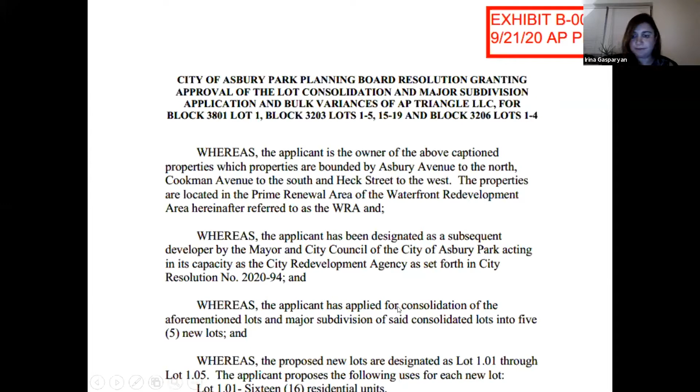Resolution memorialized. Great, thank you. Okay, we have an application for 503 8th Avenue LLC. They have requested to adjourn to the next meeting on November 2nd, 2020.

Can I get a motion to— If I may, sorry for the interruption. Madam Chairwoman, I've reviewed the notices with Irina in great detail today. They were in proper form, so the board does have jurisdiction to hear this matter. Is this the one for 8th Avenue, Jack? Yes. Okay, so then can I get a motion for it to move to the next meeting without notice?

Jim Henry, so moved. Motion. Thank you, I have a motion by Jim Henry, seconded by Alexis Taylor. All in favor, say aye. Aye. Any opposed? Thank you. Application carried to November 2nd, 2020 without further notice.

We have, if I may, Irina, I think I saw an email from Kevin that in addition to the request, he said that he would extend any time necessary. Is that correct? Yes, sir. Okay, thank you, thank you.

Okay, so the application that we have before us today is for 202 to 204 7th Avenue, block 4201, lot 3 and 4. All right, let's get started.

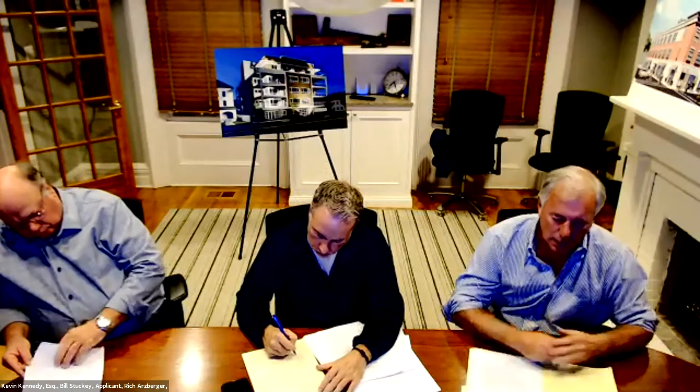In that 45-day period, Rich and I met immediately—he's great at sketching things out. We put the lobby off of 7th Avenue with a vestibule, and it's going to be a beautiful lobby. We created the bike or storage room and rearranged our parking. I think we lost a couple of parking spaces, but it doesn't really affect the marketability of the building. Then I went down to Trenton and met with Michael Sullivan and went through the changes we had made. Michael and I talked for a couple of hours, and we made some changes to the exterior finishes of the building.

In November of 2019, we went back to the TRC. Before I talk about that meeting, I want to say, out of this first TRC meeting, the building became better based on those comments, which I don't think a lot of developers necessarily say, but it was a good thing.

So I came back with Kevin and Rich. I think we were there for 10 or 15 minutes, and everyone liked the changes, made the building better, and I think everyone was in agreement this was ready to go to the planning board. So that's about all I have to say.

I've reviewed the comment letters from Insight and Clarke Caton Hintz and talked to my professionals. There's a lot of minutia that we may have to go into tonight, which is okay, and Rich and Walt are ready to do that. But I think the question ultimately that I'd like you all to consider is, is this a good looking building? And do you think it belongs in the WRA? I know the TRC felt that way. Pat and I feel that way, as does Sonnenfeld and Trocchia. So without further ado, Rich is going to go through his presentation.

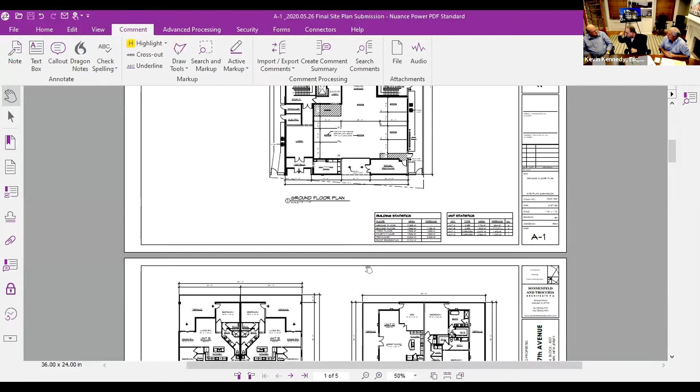Irina, can we get the rendering up, please? You want the rendering up first? Please, please. Sure. Okay, everyone see that? Yes, thank you. All right, and that's been marked into exhibit as Exhibit A2.

So Rich, why don't you describe what the board members and public are looking at? I'll wait for it to generate. Okay, what you're currently looking at is a color rendering of the proposed building, this is the view from the street. As you can see, the building is a 5-story, 14-unit multifamily building which has a roof deck at the uppermost level, as well as a parking garage at grade, which provides 23 parking spaces within the building.

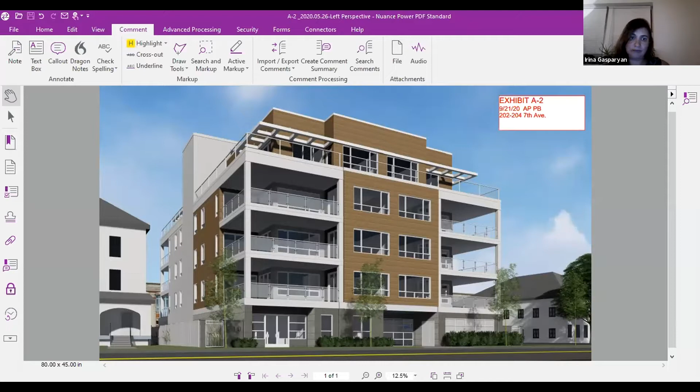Rich, do you want me to bring up the plans? Yes, the sheet A1 to start with. Okay, and these plans have been marked into exhibit as Exhibit A1, dated 2/27/20.

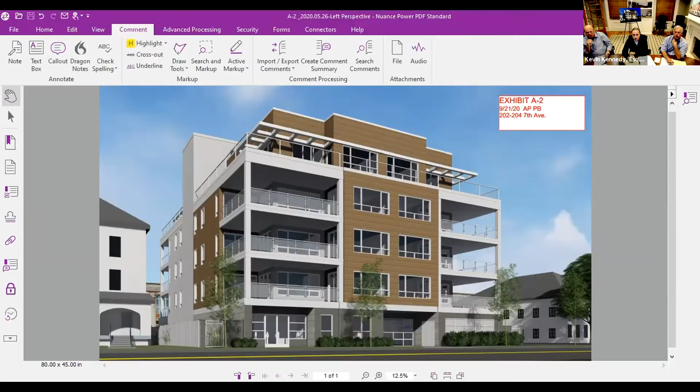Okay, exhibit A1. What you're looking at is the ground floor plan for the building, basically the parking garage level. In the lower left-hand corner is the main entry lobby, which provides access to the elevator lobby and stairs. Behind the stairs is a bike storage room, accessed solely from the exterior.

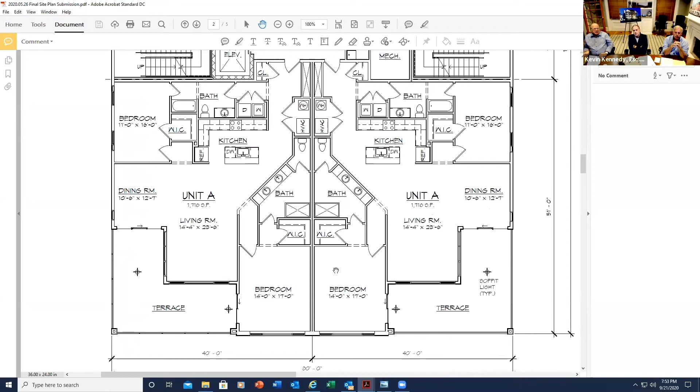The top floor, which we label the penthouse floor, is next to that. In this case, what we were proposing to do is provide larger luxury units, true penthouse type units, in which the living area is larger than the units below, basically creating a premium unit.

In addition to the 2 bedrooms and 2 baths, there's a half bath as well as a den and a very large great room area for living and an expanded island kitchen area. The terrace wraps around each of these units. This is the front unit, basically half the building. On the other side of the corridor is the rear unit, which is slightly smaller than the front, but has many of the same components as the front unit.

That has a double master suite, half bath, as well as the enlarged living area and kitchen, and a very large den. So these are premium luxury units which are located on the top floor of the building.

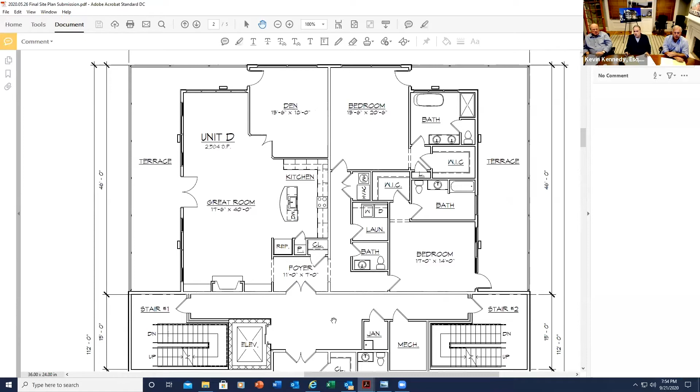As I said, that stair and elevator goes up. Both stairs and elevator go all the way up to the roof, which you'll see on the next sheet.

Now this is, what sheet number is this? This is what, A4? Yeah, sheet A3 of the submission.

As you can see, the stairwell and elevator go up to provide access to the rooftop deck. The usable deck area is primarily to the front side of those two elements. Between the two elements, we've located a kitchenette to provide service to the upper level rooftop recreation area, which provides for passive entertainment. We've also provided a grill and so on.

You'll also notice there are a number of HVAC units, which are condensing units, located in an enclosure to the front adjacent to the stairs. We also have some additional condensing units located on the rooftop to the back. The roof area is basically just primarily for those two mechanical equipment areas, with no access for resident uses provided—it's mainly for maintenance purposes. As you can see, there's a door that goes from that kitchenette area to provide rooftop access.

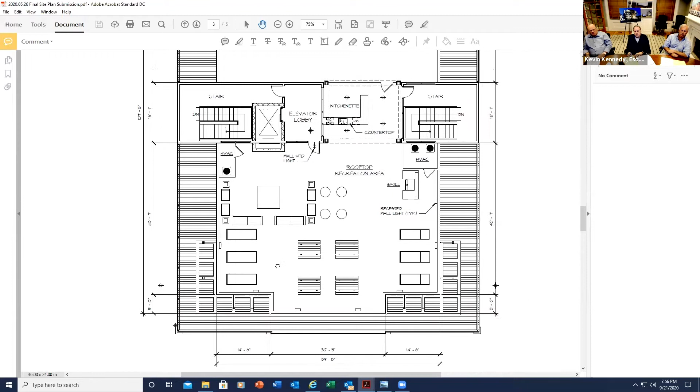And that's basically the way the building lays out in terms of plan. Next, I'll go over the elevations.

Next sheet. Next sheet is sheet A4 in our submission.

And the top elevation illustrates the front elevation of the building, which is what you would see from the street. As you can see, the building height is proposed to be 60 feet.

The primary material used throughout the building for cladding is fiber cement board product—various types, textures, and colors, but the entire facade treatment is done in fiber cement cladding, and that's described in detail on the elevation. You'll notice that at grade level, the access to the garage is by way of an aluminum and glass garage door.

I'll address that specifically in the comments for the Clarke Caton Hintz memo. Likewise, the guardrails for the individual decks are composed of glass and metal. I'll also go into some detail on that.

The windows are a combination of fixed and casement windows. There's also some windows located in the refuse area, as well as the parking garage and entry vestibule, to give more interest at the street level.

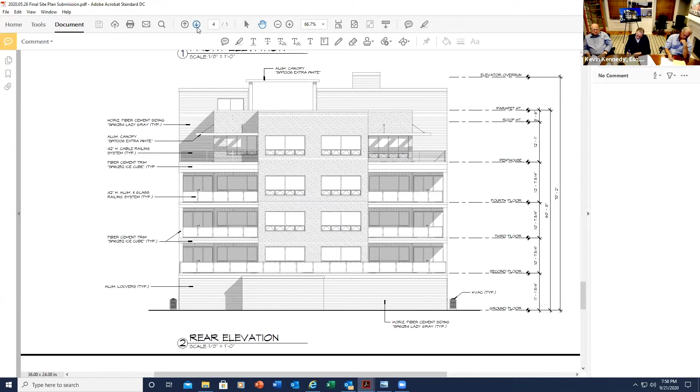And I think as far as the architectural drawings, that completes our submission as far as the architectural drawings go.

The next thing I'd like to address would be the comments from the planner's letter, Clarke Caton Hintz letter, dated September 14th. In that letter, specific testimony was requested with respect to waivers that we will be seeking for the application. I'm going to go through a number of the waivers required in terms of architectural waivers. I think Mr. Stocky plans on testifying to a few of the more owner-oriented elements, but I'll go through the architectural ones.

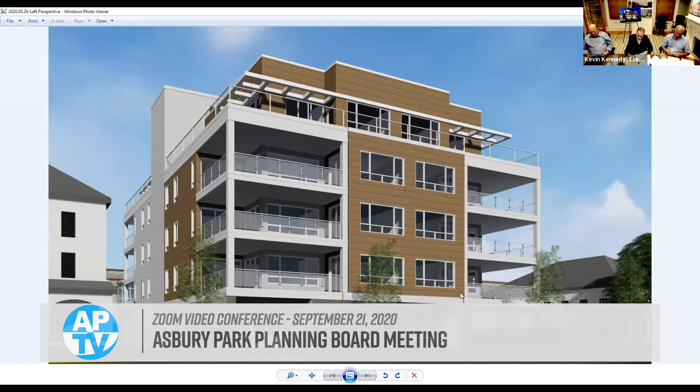Item number 5 deals with the masonry or metal parapets required under the guidelines, which call for a 42-inch railing height proportioned by a separation of grill and handrail or some other such method. What we're proposing instead is a glass guardrail, as illustrated - a safety glass guardrail held in place by metal posts and rail. The idea was to provide maximum transparency so nothing obstructs the view to the exterior, either from the outdoor terrace or from the interior of the units, particularly the primary living area. We believe this is still in keeping with the overall design theme of the building, and we're therefore seeking a waiver from the requirement.

Item number 6: windowsills shall be provided and lintels may be shown, but the windowsill should slightly overlap the width of the window opening without projecting more than 2 inches. The building's window design does not provide windowsills. In this case, we're looking for a clean look without windowsills - as you can see, there is no extension along the bottom part of the window. It's more in keeping with the contemporary expression we're seeking here, so we're seeking a waiver from the specific requirement of providing a windowsill.

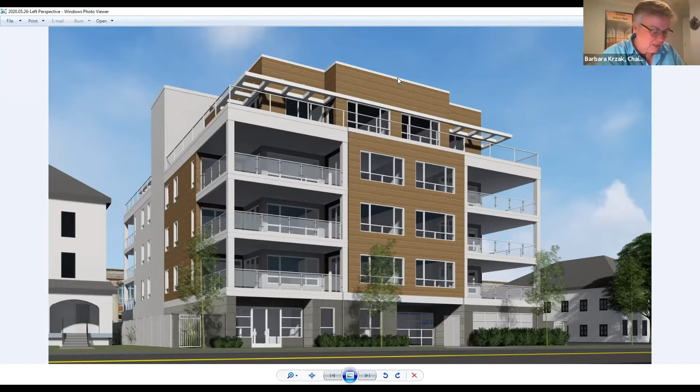I'm sorry Mike, just one second, I just want a clarification. Is someone going to be speaking about the lighting, the lighting plan, and the lighting fixtures? I guess that's what, yeah, Rich. Yes, I'm addressing that. Okay, so then your testimony isn't finished because we haven't gone over the lighting plans or the fixtures you've provided us, right?

To the best of my knowledge, both the revised lighting plans, as well as the fixture cuts, were provided to the board as part of the submission. That's correct, but are you going to be reviewing them with us? Yes, we absolutely will. Okay, so someone will be doing that. Yes, we'll continue, do you want us to do that now?

Do you want to finish with the questions? We'll have Rich testify as to that. Okay, if someone else is going to do it, I just want to make sure. No, we have.

It'll be Rich. Okay, go ahead, Mike. I'm sorry, no problem, I'll stop the questioning on the lighting there then.

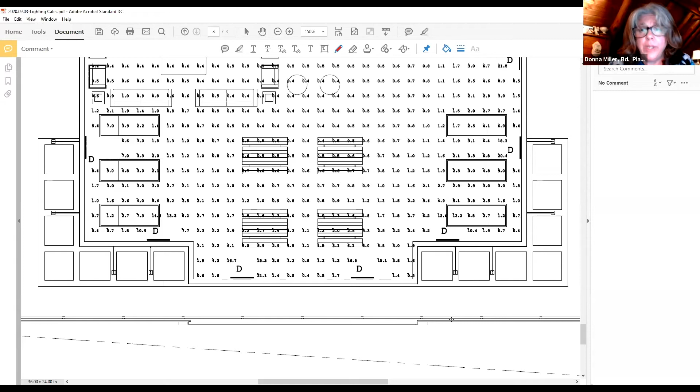Can I just interrupt? I'm sorry, Mike, it's Donna. So are we going to get copies of this revised lighting plan to look at? Because I don't have them. There were some in our packet dated September 3rd.

When we received the comment letter from Insight, which had issues needing further clarification with respect to the lighting and foot candles, I called the architect and said here's the comment letter, revise them. They were sent to Irina, I believe, and Donna, I don't believe they've been sent to you yet, or Irina could address that. Even if you got them the day after we sent them in, you wouldn't have had time to analyze them. So with respect to the new plans Rich was talking about, we would suggest that during compliance, you and Insight have final say over whether we're complying or addressing the issues the board has.

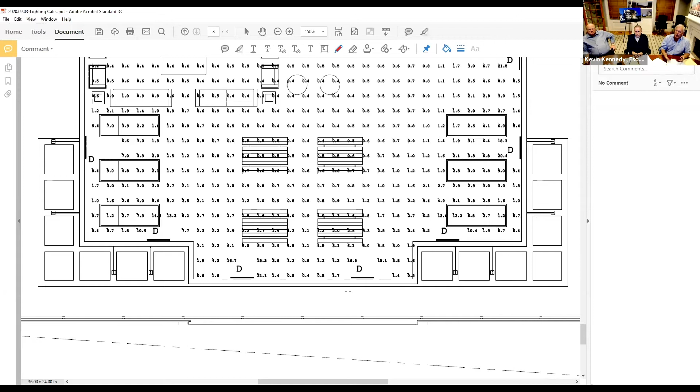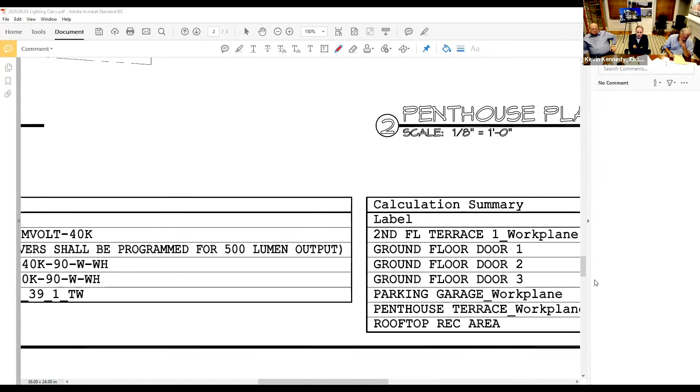Well, I think the board would rather decide whether it complies and not leave it to either Jason or... the board should have a presentation to us about the lighting plan. I'm guessing the date on that was 9/3/20, that's the plan we're talking about? Yes. Okay, so we have that, I have a whole lot of pictures of fixtures that were also included in our package. I would prefer not to have it left to our engineers or planners, the board needs to witness this. Madam Chair, that's an excellent thought, and we will address that after we're finished with the questions. We'll have Rich testify to that.

Does anybody else on the board have any other questions? I had one more question, sorry.

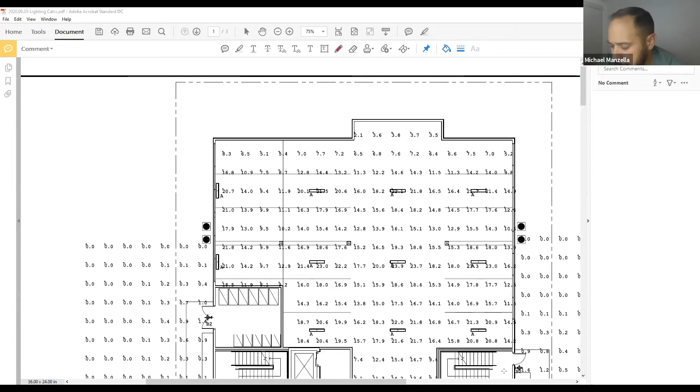So when it comes to item 6, you were talking about windowsills. And I agree that with this modern design, windowsills are probably not necessary. However, my only question is, the 6 larger windows that make up the bulk of the front facade, it seems like some kind of treatment is needed there, other than just a flush window right against the siding. I don't know if those are operable or not, specifically.

The windows you see, why don't we go to the elevations? You can see it a little easier there. Okay, let's go to the front elevation. The window units, which I assume are standard window units, come with a brick mold around the perimeter. So you see a little wider outline around the windows, and on a drawing like this they'll be more noticeable, and they're not flush. They do have some relief to them.

The windows themselves, for example if you look at the windows in the center of the building, you'll see there are 3 windows above 4 windows. Where you see a little triangular dashed line, that indicates those windows are casement windows. So the 2 end windows are casements, all the other windows without that designation are fixed. Between the 2 casement windows you have a large picture window, and below it individual fixed units as well. The windows come from the manufacturer as mulled units, so all 7 of those individual units are combined into one at the job site.

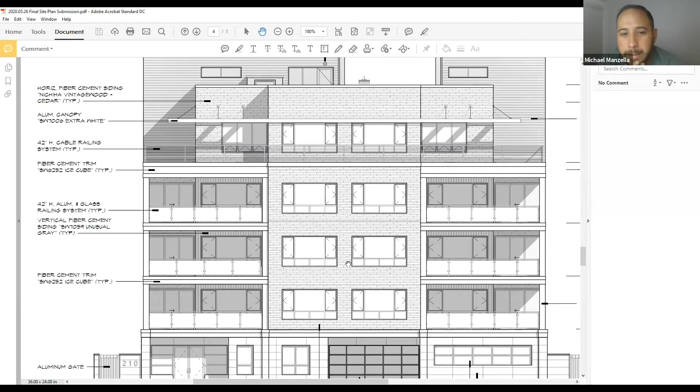Great, that clarified it. So the brick molding you were speaking of, that's not flush with the facade, it has some depth to it? That's correct. Okay, then that answers my question and comment. Thanks.

All right, on one, can you go back to what you just mentioned? Out of those 7 pieces to that window, how many of those are open? 2 of the 7, as I said, the 2 vertically oriented ones with the dashed lines. Those are casement windows. Where they come to a point on the outside, that's the hinge side, and where it widens out, that's the side which opens.

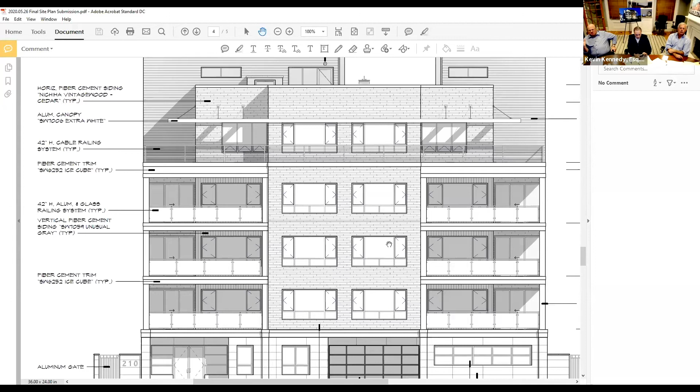You follow? Yes, yes. Jim Henry, I've got a couple more questions about those windows. You answered one of them. On the windows on the north facade of the building, the 2 casements are the only ones that open. How about on the patios? It looks like there's 2 other windows on the patio that open, but how about the others on the east and west side? Are they fixed?

Okay, you're talking about the side elevations. So once again, this is the side elevation, you'll see that once again. No, I'm talking about the north elevation. The north elevation, that's the front elevation. Front, okay.

Okay, the front elevation - immediately to the right of the windows I was discussing, there's a triple window with 2 casements and a picture window in the middle. The 2 casements on either side of the picture window are operable. To the right of that is a sliding glass door with an operable center panel.

You indicated that you have no sills, but that the windows are not flush. What is the setback from the front facade? Probably 1 inch and a fraction.

The wall construction for the upper levels is wood frame, with the fiber cement system we're proposing there's a rain screen of approximately 1/2 inch, which provides area for surface drainage behind the cladding and for the tracks for installation of the fiber cement panels. The panels themselves vary from 3/8 to 1/2 inch in thickness. The window flanges are installed on the structural sheathing, so basically you have 1/2 inch airspace plus at most 1/2 inch of cladding material.

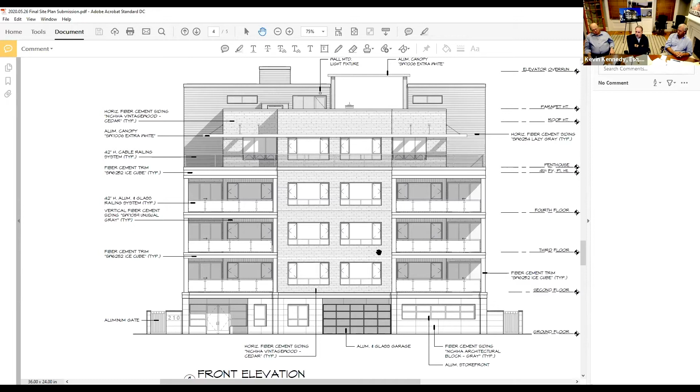How difficult would it be to put in sills on all these windows? Can we come back to that question in a little bit? Sure, when we take a break we'll talk about that and come back to you, sir, if that's okay with the chair. Anybody else have any other window questions? Let me just do my window question and then we can move on to the others.

When we're talking about the rear elevation in the center, are any of those windows fixed? Yeah, once again the top picture windows are fixed, but the awning windows are not fixed - they operate with a hinge on the top and open on the bottom. Okay, are there any other fixed windows that we should know about, instead of me asking if it is or isn't?

If you look at the 4th floor on that same elevation, under the trellis canopy there are fixed windows above awning windows. As you go down the building, likewise you have fixed windows on top with awnings below on either side, and sliders at the extreme corners on either side.

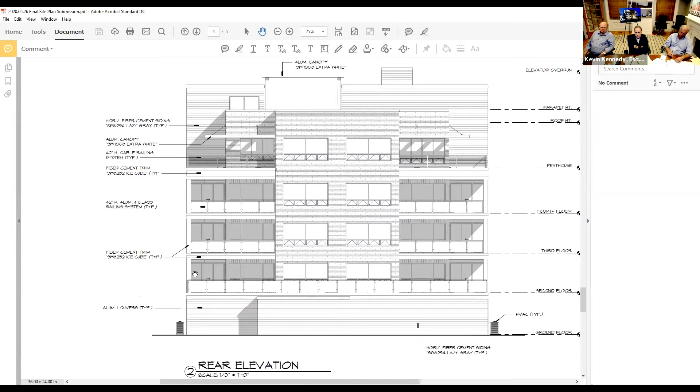On the side elevations, you'll see that triangular indication is a casement window, so those are operable. However, the windows below and to the side are fixed. Likewise, the narrow sliver windows at the very end are both fixed. You have a similar configuration as the other case, with fixed above and awnings below at the terrace location, as well as sliders. In the penthouse, the end units have casements over awnings, and in the middle you have fixed over fixed.

In each space it was our goal to provide adequate ventilation, so there are operable windows in every room within each of the units. But we wanted more light in addition, so we provided additional fixed glass as well.

Okay, thank you. Does anybody else have any other questions they would like to ask that are not window related? I have a window related question. Sorry, go ahead. This is Donna Miller.

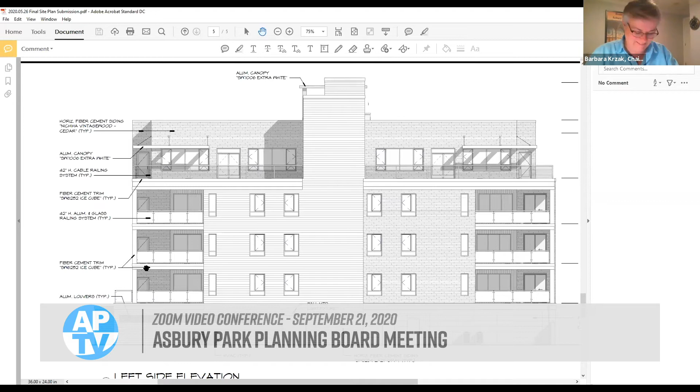So you're saying those are sliders adjacent to the triples on the balcony? Yes, sliders on the side. There's access to that terrace in 2 locations. So why don't we go to the floor plan? I'll explain it easier on the floor plan.

Now if you take a look at the floor plan, let's look at that front A unit. You see there's a bedroom in the front of the building. There's a 2-panel sliding glass door that provides direct access from that master bedroom suite to the terrace. There's also a triple sliding door which provides access from the dining area to that terrace. That's what you see on those elevations. So in that particular unit, there are 2 accesses from inside the unit to the terrace, one from the dining room, one from the bedroom. Okay, just for everyone's information.

And the balance of the windows would then be some combination of fixed, casement and awnings, which I described from the elevations. So just for Jack and Mr. Kennedy, that will be an additional design exception to permit the sliders. That's also a design criteria. Thank you.

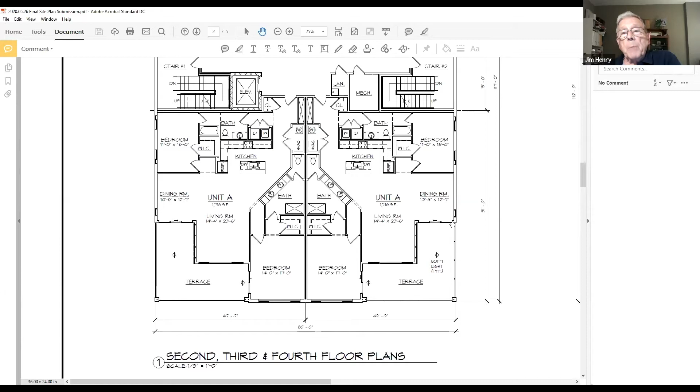That's going to be a mighty small door for a pretty big terrace. I mean, it's a standard. All we're doing is proposing a standard triple slider. I'm not sure about the clear opening when open, but the nominal dimension is about 9 feet with nominal 3-foot panels. In an open position it's probably slightly less than 36 inches, I'd estimate around 32. Okay, thank you.

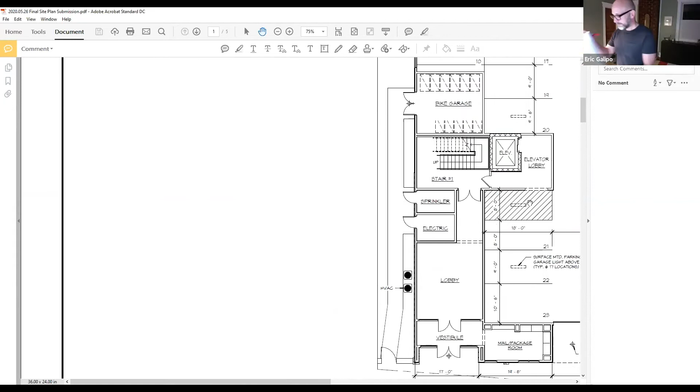I think Yvonne had a question. On page number 8, under section 4.0, the wheel stops in the garage. I understand you said you didn't think it was necessary because residents would know to stop, but wouldn't it be just a matter of safety to put in wheel stops in the garage?

Well, the only thing they would hit would be the wall, so there's no utilities, there's nothing there. Councilwoman, we can definitely agree with that, you wouldn't want their cars hitting the wall. Except the tandem spaces could not have wheel stops, obviously, otherwise you wouldn't be able to use them - tandem spaces are approved. Yes, I'm just talking about between the wall and the first car coming into that space. Wouldn't it just be a matter of safety to do that? We can do that, yes. All right, absolutely, good idea. Thank you.

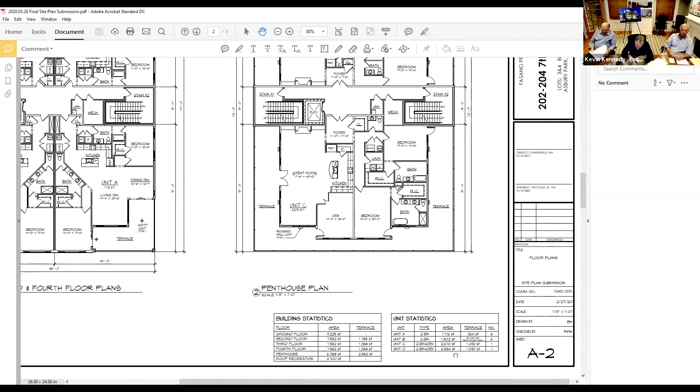Now, can you avail me of your average unit size for A and B? It's about, let's just call it 1,600 square feet. As I mentioned in my opening—read it off the plan. Read it off the plan. Okay.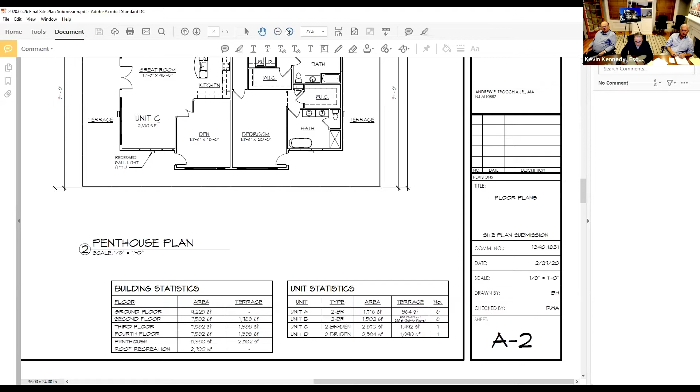Let's start with unit A, we're proposing 1,716 square feet. For unit B, we're proposing 1,502 square feet. For unit C, we're proposing 2,610 square feet. And for unit D, we're proposing 2,504 square feet.

Right, now when we add in the terrace for unit A, it's about 2,000 square feet of lot coverage, right? Right, it's a little bit more than that, it's closer to 2,100. And it's similar for unit B.

Now, the terrace size of unit C is almost as big as the entire enclosed area of unit A. Am I reading that right? You're saying it's nearly, I'll round up to 1,500 square feet of terrace in unit C? In unit C. Oh yeah, those are the penthouse units. Right, but it has a 1,500 square foot terrace. Yes.

Okay, now this may seem a little strange, but I'd like to ask about your front setbacks. Could you tell me how far you sit back from the front property line? Our engineer would probably be better able to address that, if you wouldn't mind waiting, if that's okay, sir?

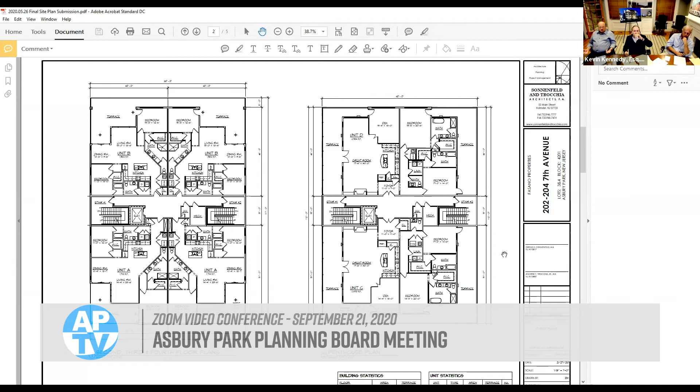And in the consideration of the general mass of your building, how can you speak to how you considered adjacent buildings or the larger context within the immediate area of your site in arriving at your overall massing and design?

Yeah, I think what we started out with, as I said, was driven primarily by the parking. The building width is actually narrower than what the regulation requires, I believe it's a 5 yard or 5 foot setback, whereas we're providing 10 feet on each side.

The rear setback had been a little bit larger, but during the meeting with TRC, we added some depth to provide a 5 foot extension for turnaround on the drive aisle of the parking area. So the building became narrower when we relocated the entrance to the building at grade level from the front. The size and shape of the building have evolved during this process.

And Madam Chair, Bill Stocky has some comments to add. Eric, immediately to the right of this building is a vacant lot, and the rear of the building faces, I believe, the motel site, most of which is a parking lot. To the left of the building, on the corner of Kingsley and 7th Avenue, is I believe a 3-story apartment building. Looks like a house, but it has apartments in it. So on 2 sides of us, we pretty much had vacant lots.

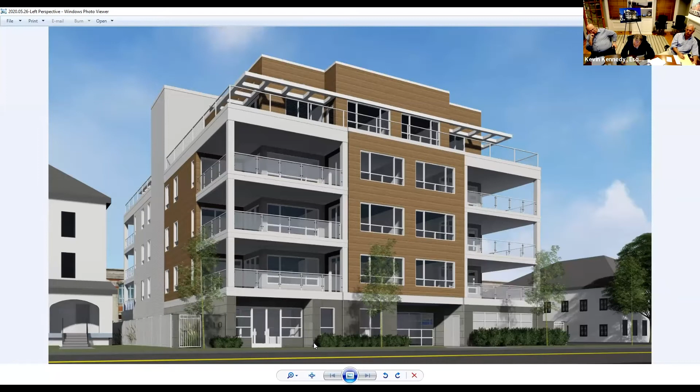Does anybody else on the planning board have any other questions? Yeah, I do, if I may quickly. On the typical units on the second, third, and fourth floor, what is the depth of the balcony from the front of the building to the glass at the rear of the balcony? You can look at A2 drawing 1. Yeah, so just for clarity on your drawing 1, what is the distance from the front of the balcony there, to the note at the other side, the shorter dimension, correct?

He's got his scale out, give us 2 seconds. Are these, is this a full size set? Are these meant to be printed on 11 by 17, or? No, that's not the scale. Okay, about 9.5 feet. To answer your question, depth of the terrace at that point. Correct, 9.5 feet. 9.5 feet. Thank you.

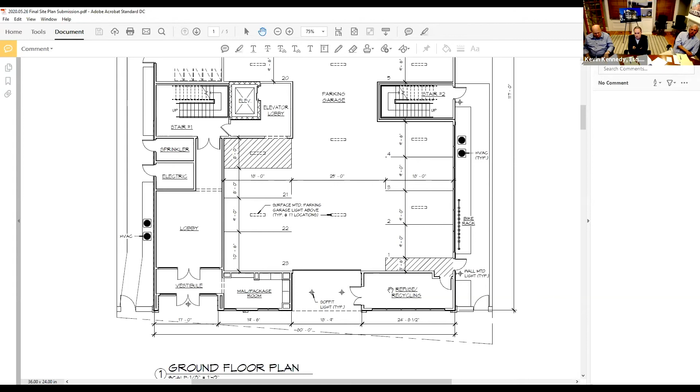Okay, thank you. All right, so the engineer will provide what the on-street striping looks like today and what we're going to have going forward for on-street.

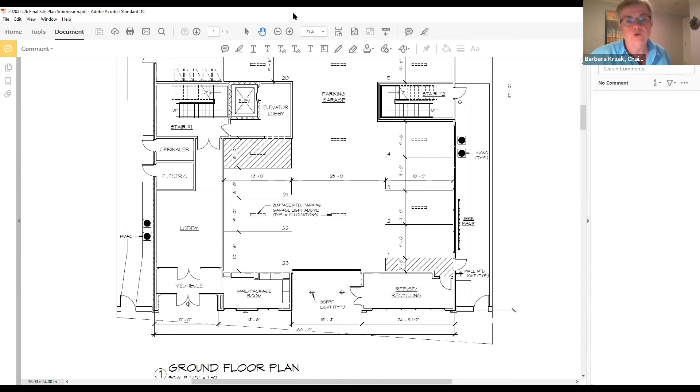There's another thing I'd like to find out, if somebody else is going to speak about it, about the HVAC. Is the HVAC on the east and west side of the building? Are you the one to speak to about that, or do we go to the engineer? Because I know you mentioned it. Yeah, I think that will be our architect. Let me just pull it up here.

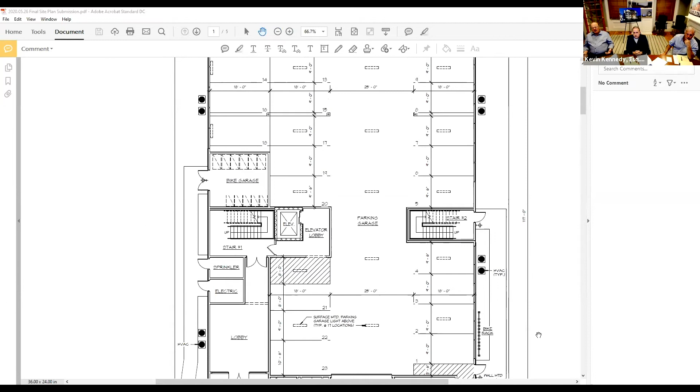Each unit has its own independent HVAC system. As I testified before, a number of those, basically residential condensing units, would be located on the roof. What you see there is a typical fixture cut of what we would expect to use, pretty much like what you'd expect for a small single family house, so each unit would have its own unit like this.

The units located at the lowest levels, we wanted to avoid a long run to the condensing units from the units themselves, so we've located 8 of those, the 8 lowest units in the building, to be at grade in the side yards. You actually have 4 on each side. Those would be screened from view from the street by the wing walls that extend out from the corners of the building, and also screened from the neighboring properties by the proposed fences along the property.

The noise from that would be about what you would expect for, as I said, a single family house's condensing unit.

Right, but at this point, this kind of equipment shall be permitted in rear yards only, not side yards. So that's why I was wondering why we would put it on the side yard if they're permitted only on rear yards.

Once again, because of the length of run it would take to get from the front units to the rear of the building, we located the 2 that are in the front for each side in the side yards. If you pan up, you'll see in the rear they're located off the side as well for the 2 rear units. No, I understand what it says, but I just don't understand why it's not on the roof like the rest.

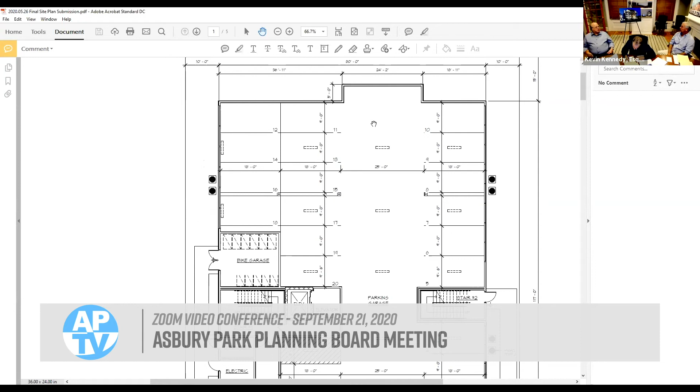Because we were trying to avoid a long run from the lower level up to the rooftop, to avoid any issues with respect to the length of those lines. At grade, you're 5 stories below where the topmost units are located, and the desire on the part of the developer was to avoid issues associated with locating them so remotely, and the extent of the line required to connect the air handling unit within the unit to the condensing unit that serves it.

It's really a practical consideration. My concern is whatever is going to be in that open lot to the right could be under someone's window when that lot gets built upon. So that's why we always said to put them in the back.

Keep in mind our setback from our wall line where those are located on each side is about 10 feet, and we're proposing a 6-foot fence. It's very similar to what you'd expect to see, or be aware of, in a single family lot.

Does anybody else on the planning board have any questions? Do our professionals have any questions? I just want to take a poll from the planning board members if they would like a 5-minute break, or we plow on. I would like a break, said Jim Henry. Okay, let's go with a 5-minute break.

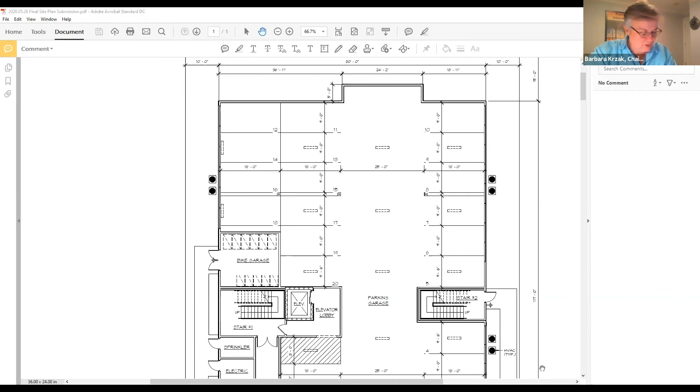I just have a quick question about whether the room is strictly internal mechanicals, or will that also be meters? The electric room would serve electric panels. The electric meters would go outside on the wall, outside the electric room, on the side wall next to it, adjacent to the electric room. The panels would be inside.

Okay, and then what about natural gas metering? Do you have any idea where they're going to be banked on the building? The gas meters will also be located on the sidewalls. On just one side or both sides, do we know? We'll let the engineer address that, because that's dependent on where the gas line is coming from.

I know on the rendering, on one of the elevations, there's an image of the address number. Is that the extent of the signage for the building? Is that the only sign? Yes, it will comply with the redevelopment regulations. Well, there really aren't any signs, that's why I'm asking. Just the street number, not a building name. No building name.

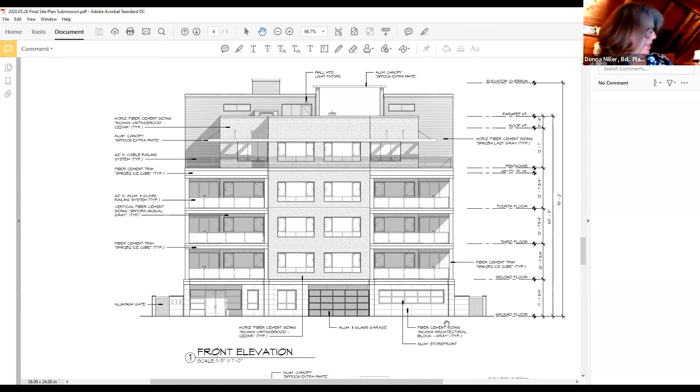I think that is it for now. Quick follow-up: I'm assuming that refuse room will be climate controlled, whatever it takes? Yes, it'll be mechanically ventilated. To the roof? I would assume to a sidewall, but we'll decide that when we work on our construction documentation. Likewise, the parking garage—you'll have to tell the board what you're doing with that issue, because coming out of a sidewall could affect your neighbors.

The board's going to have to make a decision whether they want it to come through a sidewall or through the roof. Can't go through the roof, so you might have to go an alternate route. The board is going to be the one to determine which way - it'll either go out a sidewall to the side yard, or out a sidewall adjacent to the garage door. It will not go to the roof.

The board's got a decision to make on that issue. Does anybody else have any questions, the board or professionals? For the engineer? I don't have questions, but I do have some thoughts.

Would you like to voice your thoughts before we go to the public? Yes. There were a number of points made that there are going to be amendments submitted - rear elevations, more clarification on side elevations, some other items. I think before we excuse the witness, the board should go over what the board wants to see, so we give them a detailed list of what we're looking for next time, so there's no guesswork.

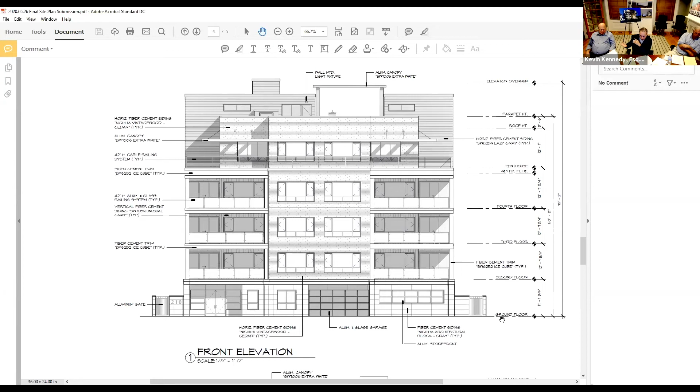I would appreciate that, thank you. Okay, you can go to the public. And Madam Chair, if I may, I think we are going to have the architect testify about the lighting fixtures and describe that. I can do that after, or before we open to the public, whatever you prefer. Well, if you do it now, then we'd have to go back to the planning board members and the professionals.

Do you think we should mention the items we're interested in before we go to the public? Yeah, and I also think from a procedural perspective, if there's additional direct testimony from the engineer or the architect, you should get it now so that you're not going to get public questions. Once the architect speaks about the lighting, he's going to be subject to cross-examination by the public, and the most efficient way is to have it all done at one time.

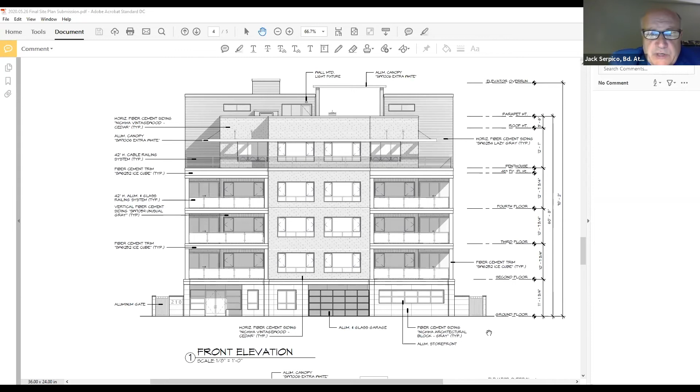So we should do the lighting now? Yep. But you should also give him the list when he's concluded of what you're expecting to see in the future, at another meeting for consideration. Okay, all right, so let's talk lighting.

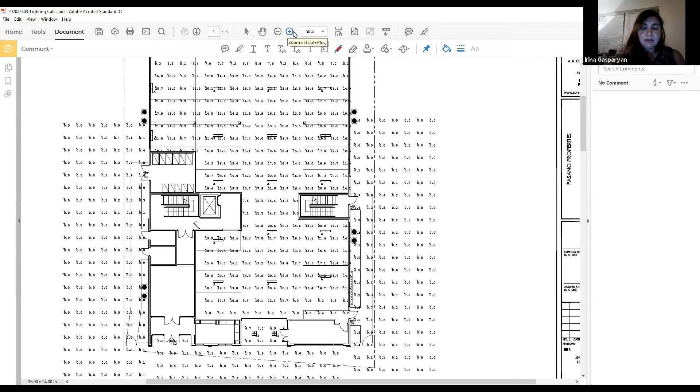Thank you, Rich. There were a number of questions brought up about the revised lighting plans and the lighting fixtures, what they're going to look like. Can you bring them up on the board and describe them so the board members can have a comfortable feeling about what is being proposed? And let's put on the record that the updated lighting plans will be marked as Exhibit A4.

Those plans are from 9/3/20, correct? Okay. What you see on the screen right now is sheet E1, part of those updated plans, which reflects the ground floor lighting level plans, exterior lighting specifically, although interior garage lighting is also indicated. The relevant site lighting is provided by lights at the bike storage room, at the stair exit, at the exit from the parking garage to the exterior by the bike rack, at the main entry doors, and in the soffit in front of the garage doors.

The numbers you see on the plan are expressions in foot candles at that particular location. This plan also indicates where the property line is, and the highest foot candle level I see outside the property line is about 0.5 foot candles at the front corner of the building, as well as near where the exit stair exits - that's the highest level, 0.5 foot candles. As I said in my previous testimony, keep in mind ambient moonlight lighting is approximately 2 foot candles, so 0.5 foot candles at the immediate property line is 1/4 what you'd expect on a moonlit night, and that's at the property line.

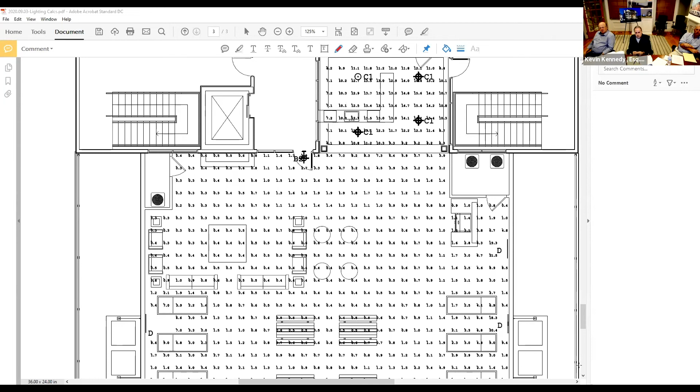The actual fixtures we're using were also provided and should be in the package that you have. We'll call up just an example. The designations on each of the respective plans call out those light fixtures and where they're located.

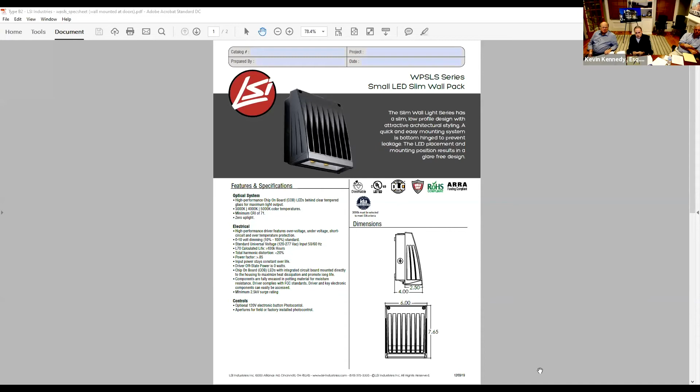Yeah. Just want to pick up any of them. Nope, wrong page. Yeah, go to any of them, Insight or Elite or any of them.

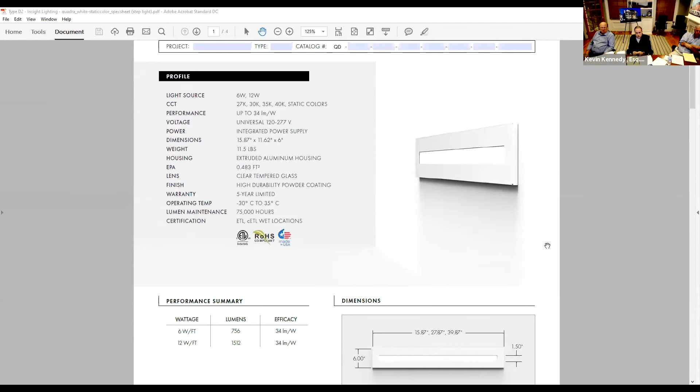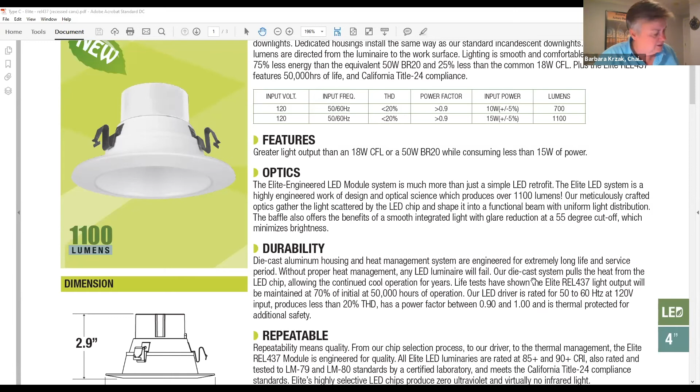Yeah, I think that's it. We also had the LED series, the OV1R. Where are they going to be? In the garage. Those are in the garage, so those won't be visible from the exterior. They're surface mounted on the garage ceiling.

Rich, it's Jason Fitchter. Just two easy ones here. On sheet E1 in the backyard, the readings were shut off. I'm assuming that's because they're all 0 back there. Yes, they're all zero. I'm not proposing any lights on that rear wall.

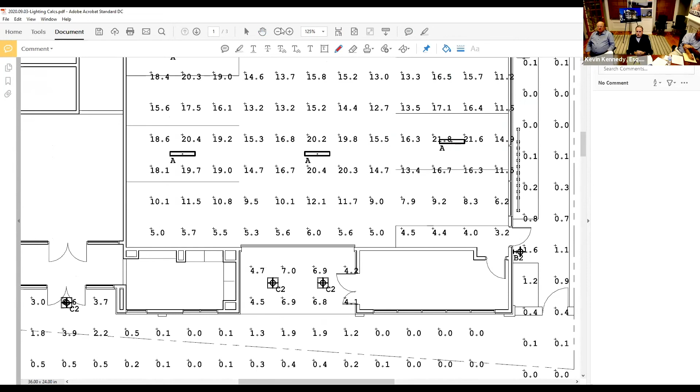And then along the side yards, on the ground, do those readings account for any spillage that comes from the balconies? No, because this is expressed in foot candles. Foot candles are lumens divided by the distance squared. By the time they reach the surface of the ground, the light is so diffuse it wouldn't register as an increase in foot candles.

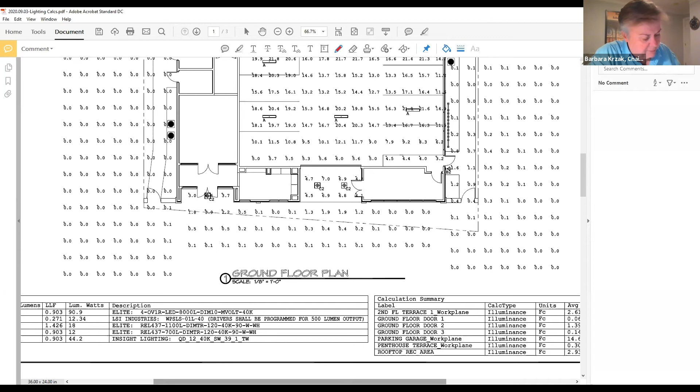Do you see that on E2, what Jason was just mentioning, that on the decks it looks like it went up to 2.1, and so there's no spillage onto the back wall? On E2, if you look at the back balconies, the second, third, and fourth floor - yes, it says 2.1. That's a lot.

I understand, it's on the left. Yeah, right there. If you look above that, that goes into where the motel is. So there's no spillage over there at 2.1? No.

If you scroll down a little bit, you see the property line? Yes. See the distance to the property line? Yes. You would express that in foot candles at that distance. As I said, the formula is lumens over the distance squared. So the further you go from the light source - and the only light sources here are right outside the door that goes from the bedroom to the terrace, and the one which goes from the dining room to the terrace - they are so far from the property line that you would not expect to get any contributive foot candle levels coming from those two light fixtures. Right.

It's just hard to see how far that property line is. That's all. Excuse me, this is Donna Miller.

But those balcony railings are the clear glass, right? Yes, so there will be light cast onto the ground. It may not be at the property line, but there will be light spillage onto the ground at the rear of the property, correct?

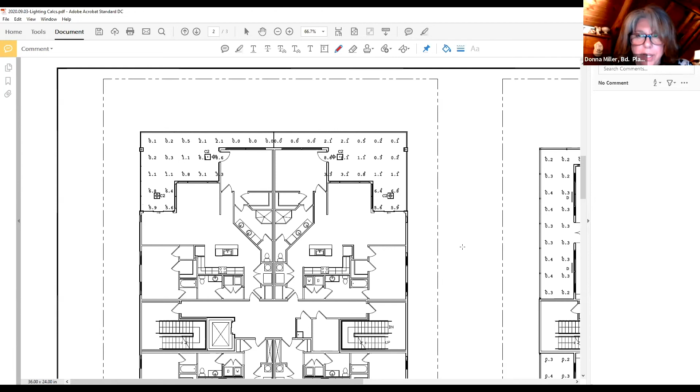Well, it's a similar situation. If you take a look at the garage level plan, you'll see how rapidly the foot candle levels drop off. For example, at the side door by the stairs, directly under that light you're at 1.6 foot candles. By the time you get to the property line, 5 feet away, you're already down to 0.5 foot candles.

So you have a similar situation out the back, and at the edge of the balconies we're talking about 0 to 2 foot candles. By the time you get 15 to 20 feet away from that, the foot candle level is 0. So if we were to take the back, it would be the same as the sides, but since there's no light source there, we didn't take it in that location. We only took it off the sides.

But logically, based on the formula for determining foot candle levels, you wouldn't expect to find any significant levels back there. As I said, the comparison is moonlight at 2 foot candles.

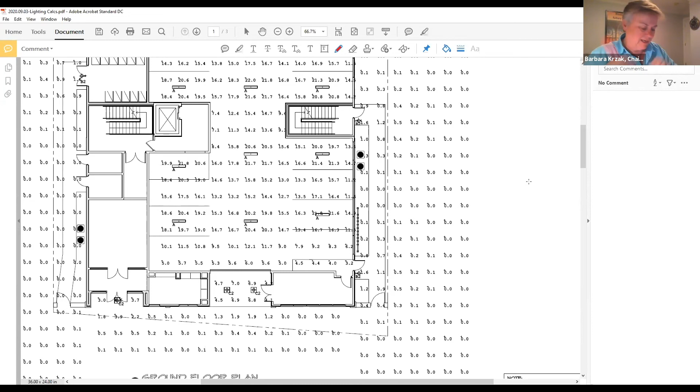While I understand what you're saying, I also understand what our planner is saying, that based on this it looks like it's 0. It could vary. I think that was the point.

All I can say is this plan was based on the way in which you calculate foot candle levels. Foot candles, as I understand it, is the only quantifiable measure found in your ordinance, so therefore this demonstrates that we're in compliance because we're nowhere near spillage of more than 2 foot candles.

Does that conclude your testimony on lighting? Yes. Okay, so does anyone on the board have any questions they would like to ask?

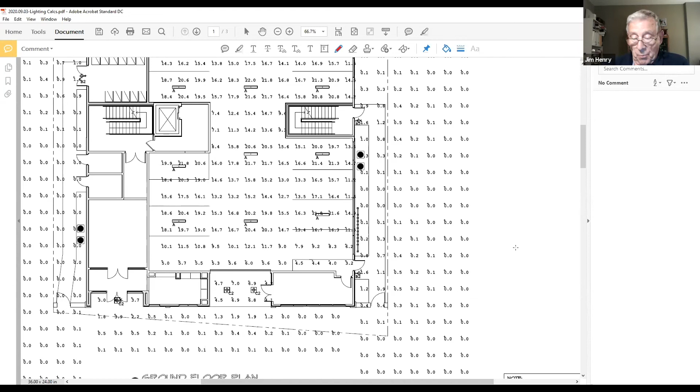Jim Henry, I have a couple of questions. Staying on this ground floor plan, to the west of the building, you run out a series of numbers I can't read on the plan you submitted, but on the screen here, what are the dimensions? How far out from the building and how far out from the property line is each one of these readings taken?

This is the property line. Are you talking about the last column on the extreme right? The numbers, I'm sorry. I can't hear you, are the numbers along the extreme right column those you're referring to? Yes. And now the next column is also 0.

Now the column changes, how far out is that distance? The distance from the face of the wall to the property line is 10 feet. So the first column of numbers beyond the property line, about 3 feet from the property line, ranges from 0 to 0.5, depending on where you are.

The next column over is approximately 9 feet from the property line, ranging from 0 to 0.2 at the highest. The third column of numbers, roughly 13 feet from the property line, is 0 to 0.1. The fourth column, approximately 18 feet from the property line, all appear to be 0, and beyond that it's 0 as well.

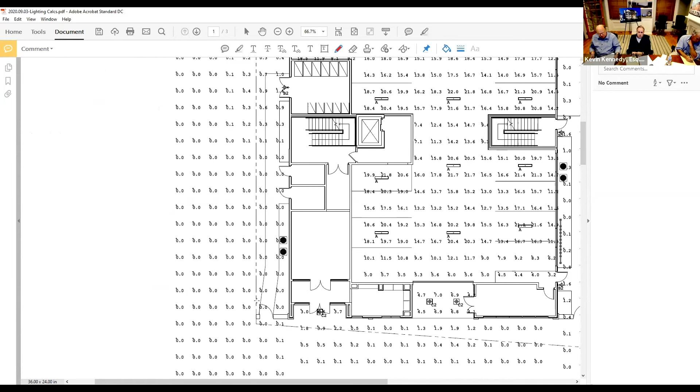And on the east side of the building, are those dimensions roughly the same? Yes, well actually they're slightly lower because there's less light sources on that side of the building. The only light source there is at the doors to the bike storage room, so in that immediate area the highest is 0.4. For most of that side property line you're at 0.

Okay, then by the bike rack area, how far out from the property line is that 0.4 foot candles? The 0.4 foot candles is about 3 feet from the property line, centered approximately in the middle of those double doors.

Okay, and then the next, the 0.1, is how far out? 0.1 is probably about 8 feet from the property line. Okay.

Anything else, Mr. Henry? One other thing I want to add. I did mention motion detectors on the garage door. The bike storage area and these other outdoor lights will have to be on motion detectors as well, so they're not going to be on constantly, just when someone approaches from the outside.

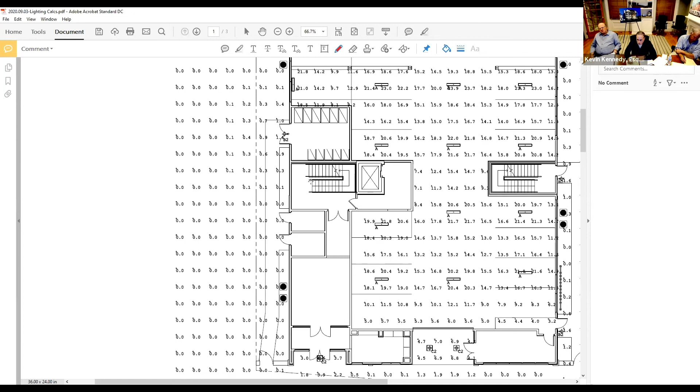Thank you, this is Donna. So you said the exterior lights on the bike storage and stair tower, those are the B2 fixture, right? The wall pack? Yes, and they'll have a sensor. What about over by the utilities, the electric room and sprinkler room, no lighting on those doors? No, there'll be no lighting on those doors, just what's used by the residents. All right, I think that's it for me. Thanks.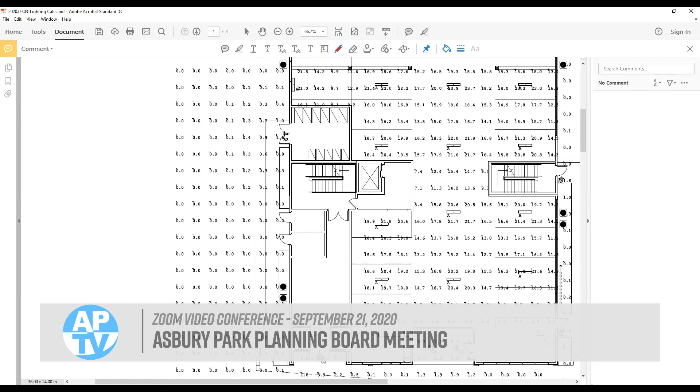Ernest Magnoli, 400 Deal Lake Drive, apartment 5D, Asbury Park, New Jersey. I live approximately two or three blocks from this project. I hope you don't mind I call you Mr. Architect, but if that's okay, I'll use it. Okay sir, sure. So far, in terms of footprint of this building, I haven't heard anything, but I'm going to ask.

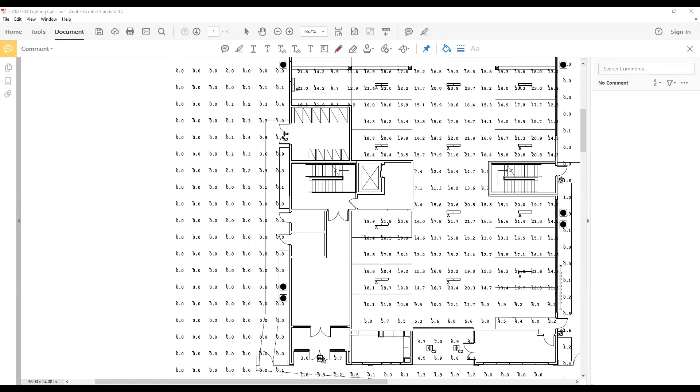But you did say the building is 60 feet tall, correct? Yes. Does that, now, is that from the ground? I mean obviously this is built on a slab, correct? Yes. Okay, so from the ground level, the slab level, to the top of the structure, the roof line of the fourth floor, does 60 feet include, I guess you have to have an elevator tower up there, penthouse accommodations, a fence around the roof for the penthouse? Does that include all that, or just to the top of the fourth floor? No, that's your building height measurement. You exclude items such as rooftop mechanicals, penthouses, elevator overruns, and parapets. So it excludes that. So basically from the ground floor, which is one, the parking level, and then there's four living levels, and the 60 feet from the ground up is the top of the fourth floor unit, in other words the ceiling level, so to speak. Everything above that, you're saying, is not in that 60 feet, the elevator shaft, the elevator room, and all that up on the roof, correct? That's correct. Okay, all right, good.

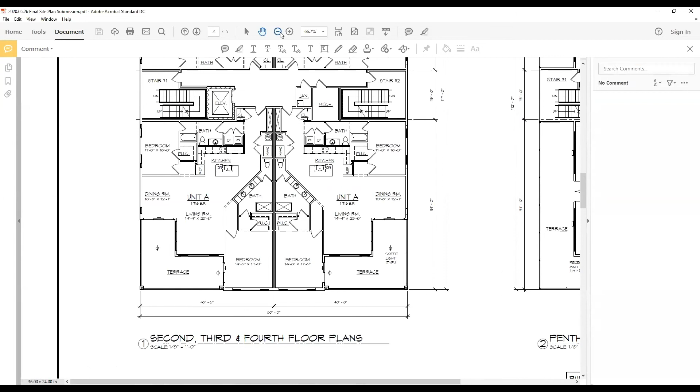Can I ask you the footprint of the building? In other words, when you stand in front of it in the street, how wide is this building? And it's one building, correct? It's one building, yes. Okay, yes, the building is 80 feet wide. The lot is 100 feet, so there's a 10-foot setback on each side yard. The depth of the building is 117 feet at its deepest point. Okay, 117 feet in depth, 80 feet in width. Okay, and the 80 feet in width on a 100-foot width lot, and 117 feet, how deep is the lot?

The engineer will answer that question. I don't think that's gonna... I mean, come on, an engineer doesn't know. Okay, you know, we're dumping everything on this poor engineer, but we don't know how many feet the lot is. I mean, you know it's 100. The lot is, I just told you, 10-foot side setbacks. I'm not sure about the front and the rear, the engineer can cover that in his testimony.

You designed the building, correct? I don't recall, no argument. Let's not argue with the witness. Stop, I'm not arguing. Both stop. The question, he can't answer the question. He told you he can't. So you're going to have to accept that and ask somebody else the question. Okay, all right, so that's that.

You have any idea on the hardware on the roof? Is it common, the way you design this building as an architect, is the roof deck and penthouse just for the penthouse units, or is it common for all the units? Common for all the units. So if I'm on the second floor living in a 2-bedroom unit and I want to go up on the roof, I either take the elevator or walk up the stairs, but it's for me too, right? It's a shared rooftop, correct? Yes, for all 14 units.

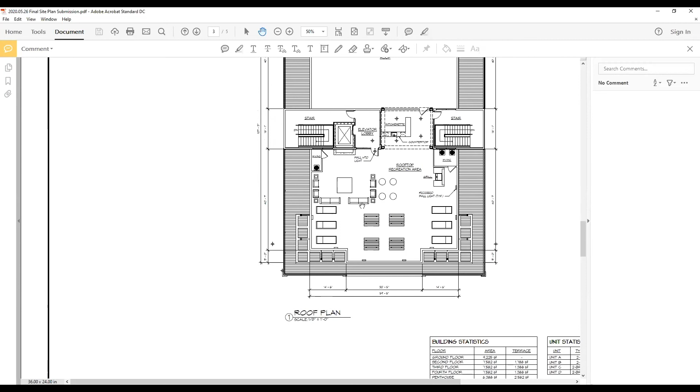Okay, so I think as an architect, how many... I don't know what you want, I don't know what to say, politically correct. How many parents can move in there with how many kids in all the 2 bedrooms, regardless if it's a big 2-bedroom or the smaller, but they're all 2 bedrooms? He can't answer that question. Okay, I'll withdraw it. He wouldn't know.

Who would know? Doesn't matter, it's irrelevant. If you're asking what's the occupancy limit, he might know that, but he can't tell you about parents, how many sets of parents. If you want to know the occupancy limit and he knows the answer, he can give it to you. If he doesn't, okay, then I'm going to ask it.

Is the second bedroom of these 14 units designed to accommodate children? I can't answer that. Okay, that's an answer. Can't answer is an answer.

So you testified that the larger units are 2,500 square feet, correct? Or up to 2,700 square feet? Yes.

I don't know what the layman's term or the architect's term is, but for a two-bedroom, 2,700 feet is rather spacious, I guess. You're offering an opinion. Okay, now that's the question: are they large two-bedroom units in your opinion? I mean, are the rooms large? No, let him answer your question. You asked the question, let him answer.

Are they large? Yeah, they're large. I mean, if the standard of reference is a normal rental apartment that's two bedrooms, a typical rental apartment, two bedrooms is around 1,200 square feet. But these are not intended for that purpose. These are intended to be luxury apartments, possibly for move-down buyers, possibly young professionals, and so on.

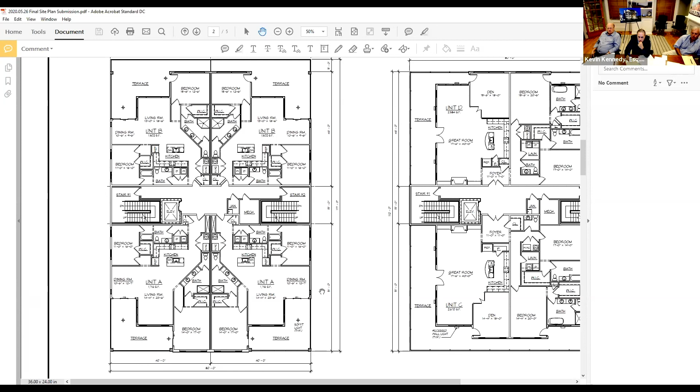So on the 2,700 square foot unit, can you just give me an idea of the two bedrooms, the length and width? Yeah, that would be the front unit, unit C, and the bedroom is 14 by 20, and the other bedroom is 17 by 14. And those would be the largest two bedrooms.

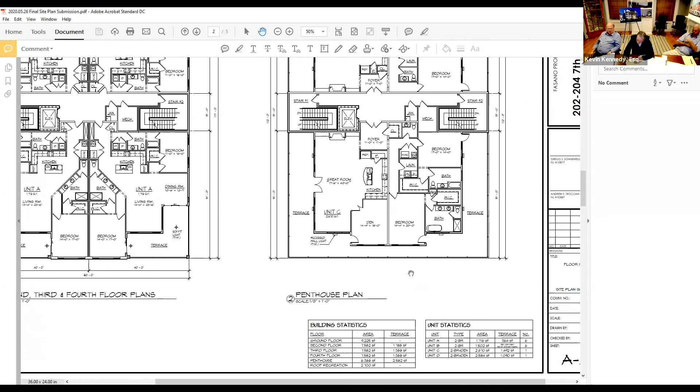I'm sorry, I didn't get that, they would be the largest two bedrooms? That's right, that's unit C, which is the penthouse facing front. That's 2,670 square feet, which is what you were referring to, those bedroom sizes I just gave you for that unit. Correct. So you answered by saying they are the largest units by square foot, also have the largest bedrooms. Yes. Okay.

And I think you testified the largest units have two baths and a half bath. Yes. At what square footage do you lose the half bath? And do all the units have at least two full baths, or do you go down to one full and a half bath in the smallest unit? I wasn't clear on that. The minimum for even the smallest unit is two full baths. The penthouses have 2.5 baths. Only the penthouses have the half additional. That's correct.

I was going to ask a silly question, I can't ask. I was going to say the penthouses are on the top floor, but I don't want to sound that I corrected. I think they are. Let's see, penthouse, two bedrooms, you answered about the children.

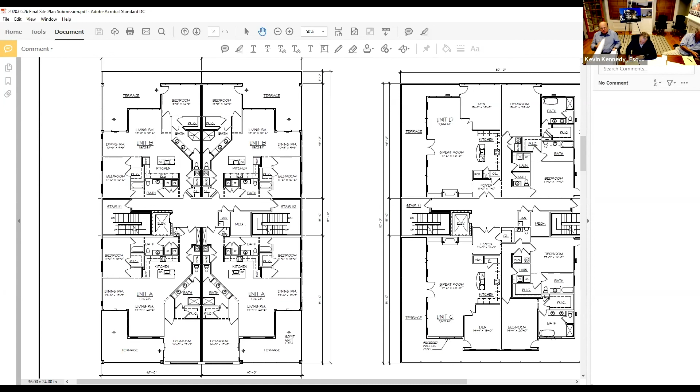So now to the parking garage, if you will. You testified there's going to be 8 tandems. Well, 8 spaces consisting of 4 tandems. Yes. Oh, I'm sorry, there's 4 tandem parking and 1 handicap. That's 4, 8, 9. And then you're saying you have a total of 23?

23. So after the 4 tandems and the one handicap, how many, I don't know what you have, what are they? 15-foot parking spaces? 15 by 8 or something, or 12 by 9? Minimum parking space size is 18 feet long by 9 feet wide, minimum, some are wider. Okay, all right, but that's basically the layout.

I misunderstood. So there's 4 tandems for 8 spaces, full-size cars, correct? Yes. Then there's one handicap, and then the rest are single spaces. Yes. Okay.

Are you going to be looking for an exception or a variance? I don't know what you may need, but for stacking, for those electric lifts, or is that just something that if it comes about in the future, if it's needed, you'll come back and apply then? Or is it something that's been entertained up front now? Because I heard you mention about stackables, and now we're talking equipment, hydraulics. I'll let the owner discuss the possibility of stacked parking, and we'll have the engineer address that as well, Mr. Serpico.

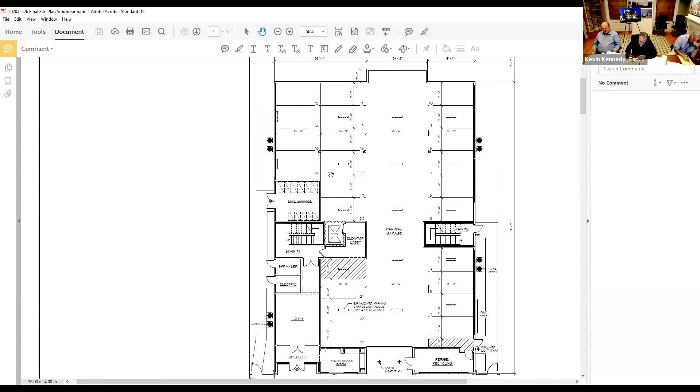Perhaps this is the time we put together to give you some input on what we're looking for going forward. Thank you, Madam Chair. I have some items now. I'd like our board members to also chime in on what they're interested in if I haven't captured it. We were interested in some additional renderings of the west and south, and renderings of what the landscape is going to look like, the streetscape essentially, so we can see that, and some ideas of the parking, which is really part of the streetscape, the parking outside the building. We'd like to see on those depictions where the refuse is going to actually go on the sidewalk, because that wasn't very clear. I don't think I had anything else on my list. I don't know if anybody else does from the planning board.

I would only encourage the applicant to explore opportunities for modulating the mass, especially as it relates to design exception number 7 on page 7 of 13, where it says balconies are elements of the vernacular, but they must be used sparingly. I don't think sparingly is an adjective that could be applied to the current application of balconies on this project. I would just encourage you to explore it.

Thank you. I think there was also a discussion of additional exceptions. I think that was for our planner, that there are some additional potential exceptions with potentially frosted glass and sliders. I don't know if anybody else was interested in anything else.